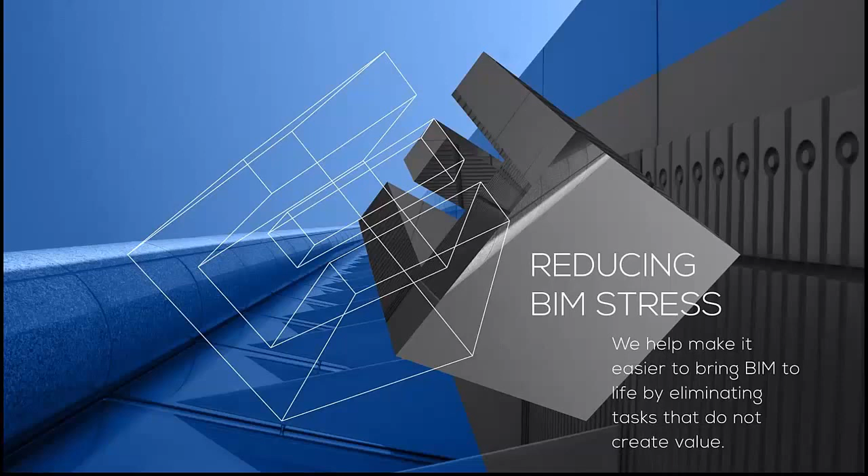At the moment we have sold more than 8,500 commercial licenses used in 129 countries. We continuously develop our existing solutions while also creating new ones based on the needs of our clients. The most important value of our team is customer alignment. We strive to respond to the needs of every client. Our work is driven by our customers' needs, and the benefits we strive to deliver are less stress in daily work, easier BIM, and satisfaction with return of investment. So our promise to the customers is reducing BIM stress.

Then we have a very powerful product, Cut Opening, for making openings around ducts, pipes, cable trays and conduits. Then we have BIM Tree Manager, which is very powerful for managing parameters and parameter values used in the project.

Then we have the Sustainable Design group, with 2 solutions. Then we have 4 solutions in the Smart Browser group. With those solutions you can very easily find families in the library, load them into the project, and modify them, so you can manage your content easily.

Then we have Tools for Revit, where you can find different solutions for documentation and modeling. Then we have Smart Assemblies, which goes for making shop drawings automatically, mostly for prefabricated elements like walls, columns, beams, floor panels and so on.

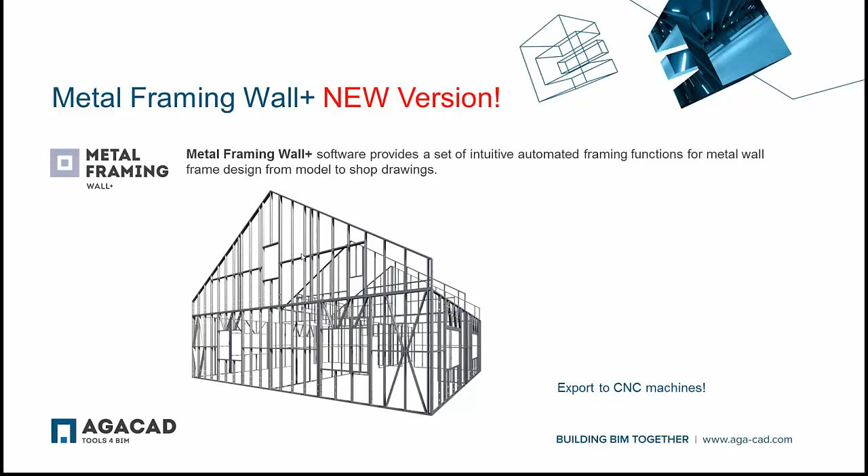Then Floor Plus, this is brand new software, but at the same time it communicates with Wall Plus because we use the same scenario for framing the floor panels. It automatically generates floor metal framing members, including joists, buttons, bridgings, blockings, noggings, and so on, and it can also be exported to a CNC machine at any time.

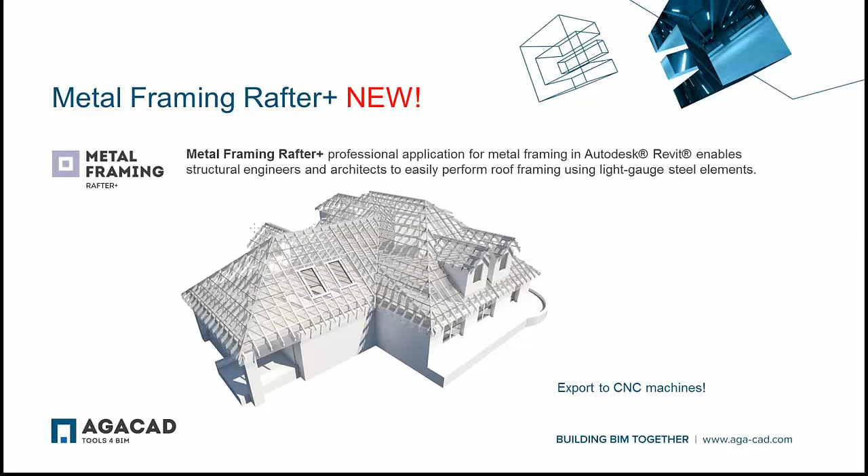Then Rafter Plus, which goes for making roof framing using light gauge steel elements. And then Truss Plus, which goes for making trusses automatically, and at the same time you can very easily make shop drawings.

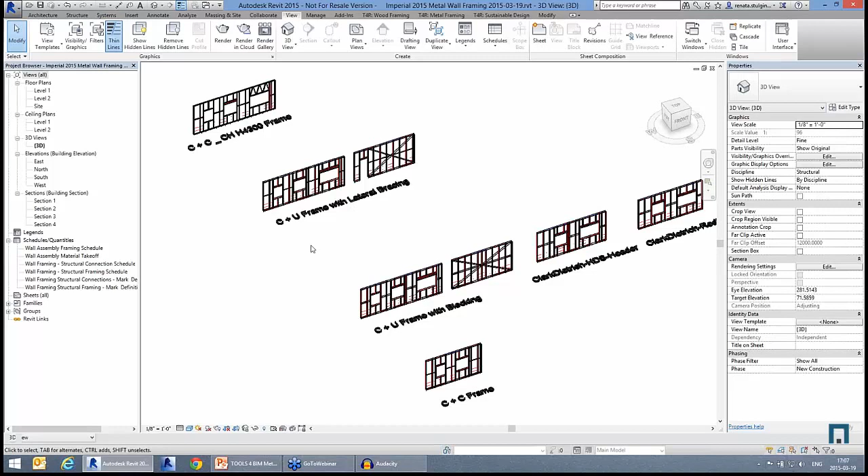First, I would like to start with a few examples and possibilities. Our Wall Plus, Metal Framing Wall Plus, supports C plus C and C plus U systems. These are the most popular systems, and if you are working with different manufacturers like Pinnacle, Howick, Metrol, or ClarkDietrich, you can very easily adjust those frames and predefine them exactly according to your current manufacturer.

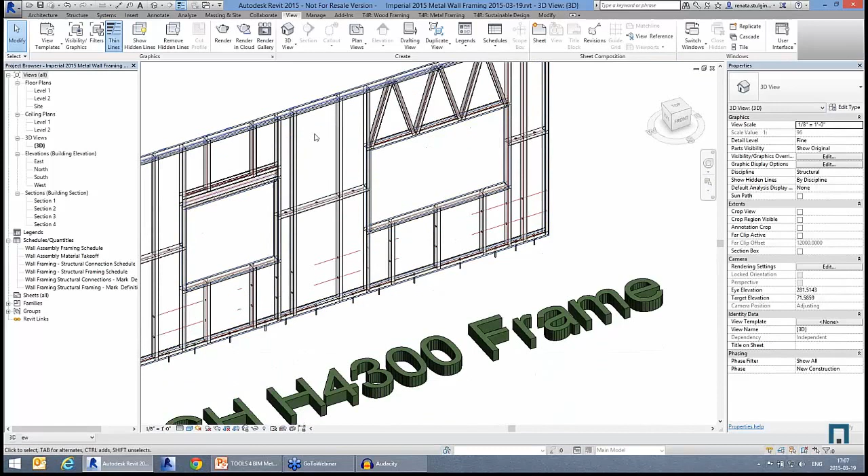So let's take a look into this C plus C system. As you can see, that system is tempered, so you can get such wall and frame ends. Then we can take a look into the C plus U frame with a lateral bracing.

So we can check here how those bracings look, and at the same time the tool automatically can distribute different connections. As you can see, U profiles are in the bottom and top plates, and for the studs we use C profiles.

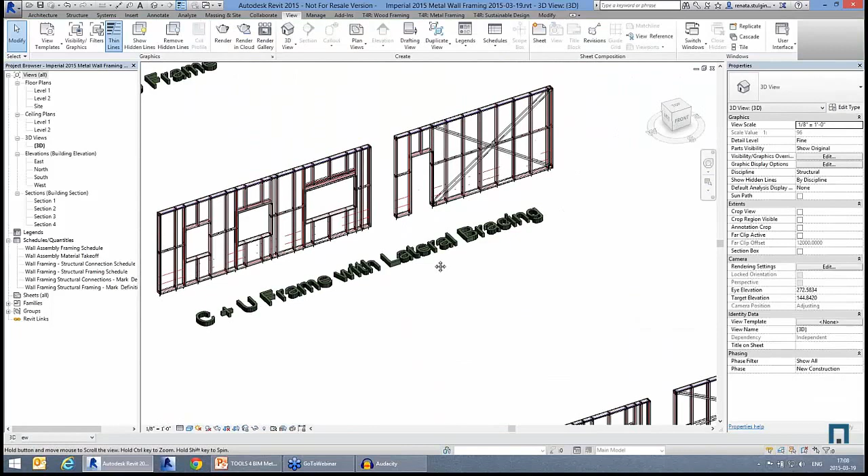Actually, those families, in my case I'm using Simpson family, but you can use any families you need. The main purpose of our product is to distribute those families in different ways according to your framing system.

Then one more example, C plus U frame with blockings. Again, we can take a look into those frames and into those connections. One more example.

Here we have ClarkDietrich headers, so you can use such headers if it's necessary. And also one more ClarkDietrich with a red header. Here we can take a look into the red header.

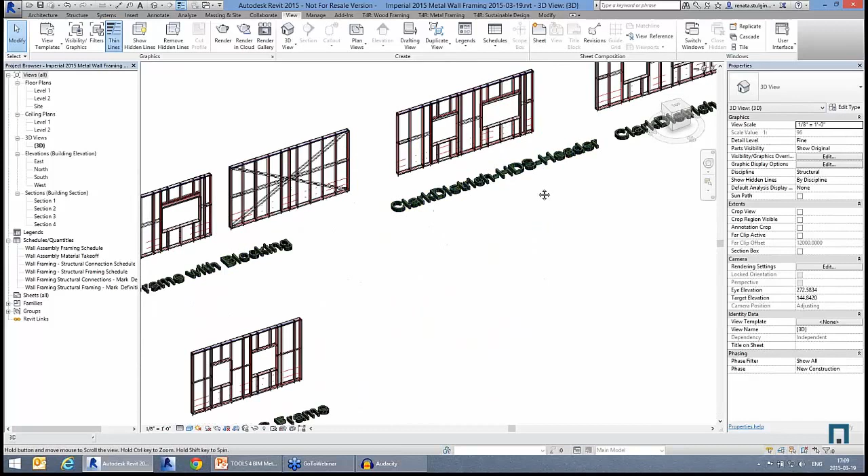As you can see, there are different options and possibilities for distributing frames. And as you can see in this example, we even have the offsets between those profiles.

Now let's start from the beginning, and I'm switching to my projects, and here we were going to try both those two systems, C plus C and C plus U.

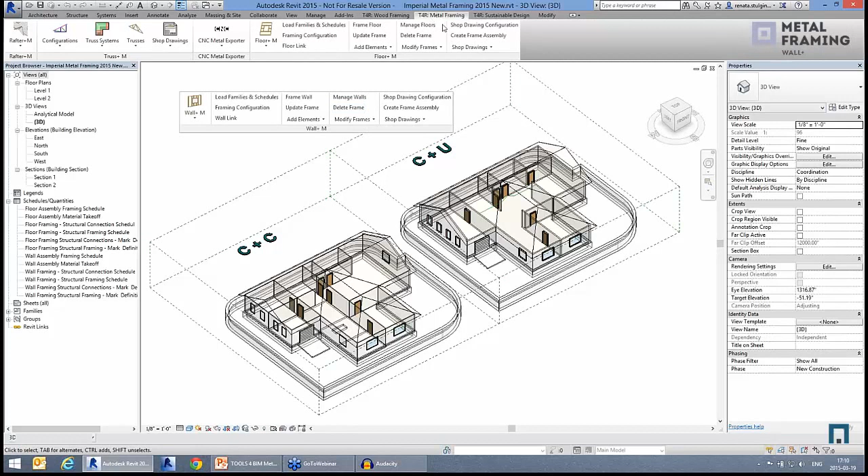After getting the installation of the Wall Plus, or for example Floor Plus, you can find those solutions in the Separate Tools for Revit Metal Framing tab.

The first thing you have to do before working with the project is load sample families and schedules into the project, and then with the framing configuration,

you have to find and predefine settings for your future frame. So the first thing you have to do is choose exactly what configurations you're going to modify.

So we're right now going to check the main frames, but you can also use secondary frame. Actually, in your wall you can have 2 layers, or even 3 or 4 layers, with different metal frame profiles.

Actually, with the software, there are no differences if you use 2, 3, or 4 layers in the wall - still we can very easily frame them. So there are no limitations in the amount of layers.

Then we can predefine our own configuration. Actually, those 4 are sample configurations that we provide with the product, but you can modify them and save them for your future projects, and also share that configuration with your colleagues, because those configurations are saved in a separate XML file.

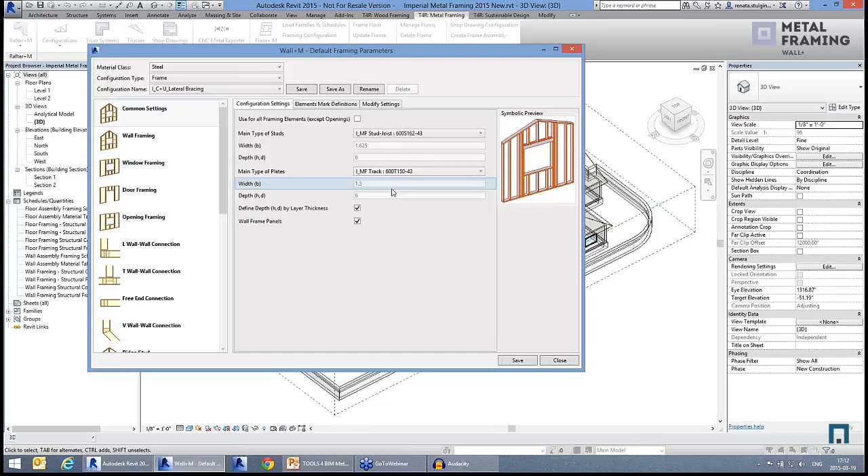Again, those families are our families with the profiles, but you can modify them easily if necessary. Also, you can predefine and add your own new types.

Then element mark definitions - it's a very important tab, because here you have to predefine your own marks and descriptions for different elements like top trimmers or sill plates, headers, and so on. That information will go into the schedules later, so that's very important.

Then with the wall framing settings, you have to choose what will be the distances between the main frames, what kind of top plates you're going to have and how many, the same with the bottom plates.

Then we have window framing. You just need to predefine your own settings for different window sizes. That's very handy, because you can have your own setting for small windows and another setting for big windows.

If we take a look into configuration, this is a separate dialog for predefining different headers, then for predefining sills, trimmers, other studs, so you can choose Pratt or Warren, diagonal cripples if necessary, and additional offsets. Then it's the same for door framing, and very similar for opening framing.

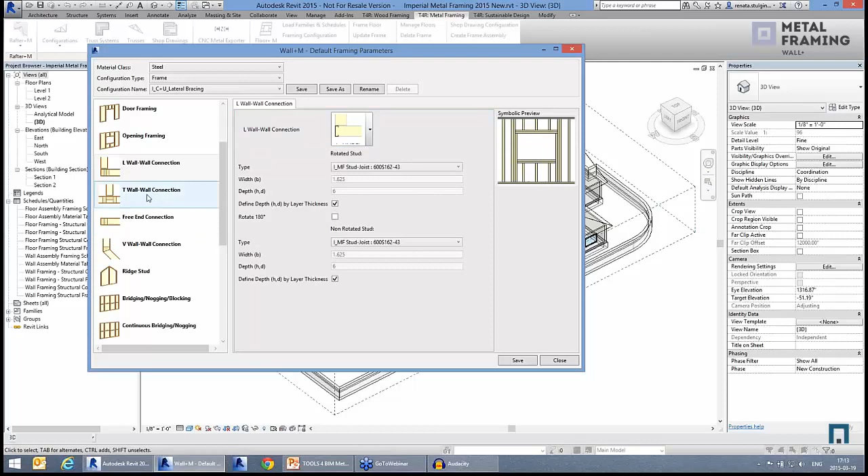So let's say if you have a duct or pipe going through the wall, we can very easily frame that. Then we have L connections, and with the new version we added additional L connections, then again T connections, free end connections, V connections.

Then you have to choose what bridgings and noggings you're going to use, what will be continuous bridging and nogging. Actually, this is a new feature that we added into the new Wall Plus version.

Then we added additional possibilities for the secondary bridging and nogging or blocking. Then we have the possibility to add bracings, then additional studs, additional noggings, and then details.

For the details, also with the new Wall Plus version, we added the possibility to insert different details, and you can have your own families and predefine those families, adding them automatically into different positions of your top plates or bottom plates, bridgings, headers, sills, and so on.

Then we have the possibility to add service holes, additional details on the studs, and stud holes. After going through that configuration, you just need to save it, and we can run the process.

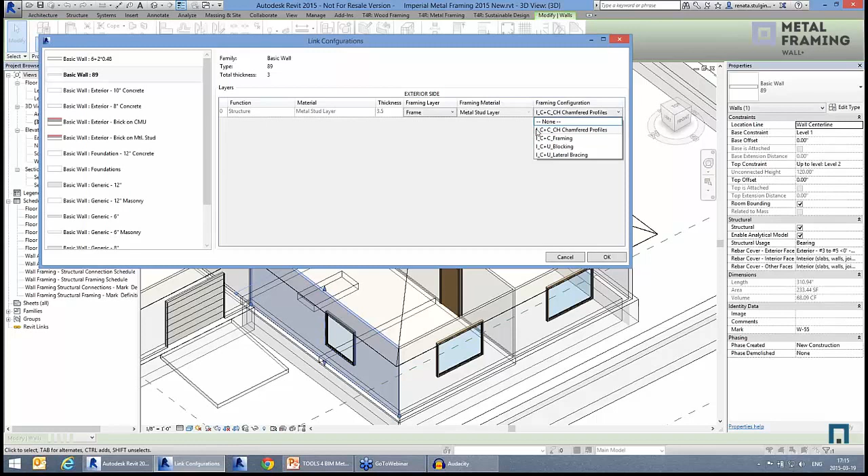I'm going to select several walls from different systems. Just before that, I want to show that here I have a wall with one layer, and this wall layer is linked with my configuration. After making your own configurations, you just need to make a link. This will show you the list of all walls used in the project, and you can link the layer together with a framing configuration. The same if we take a look into these layers, here I have a basic wall just with main layer, and then two layers from both sides.

It goes for the sheeting. It's very easy to make the link. You just go to the wall link, and say what framing configuration you use for the main frames, and then we're going to add sheetings from both sides. Now we are ready to add those frames.

I'm going to filter different walls with different shapes, and now we have to run the process. After pressing frame wall, the tool is adding frames according to our configuration settings. Now the tool knows exactly where to put the frames, because it reads information from the wall layer and distributes the frames exactly according to the predefined configuration.

You can very easily see those possibilities in the dialog. In the Revit model, now there are two walls framed, and you can see the process. Actually, all those frames are just regular structural framing elements, under the structural framing category.

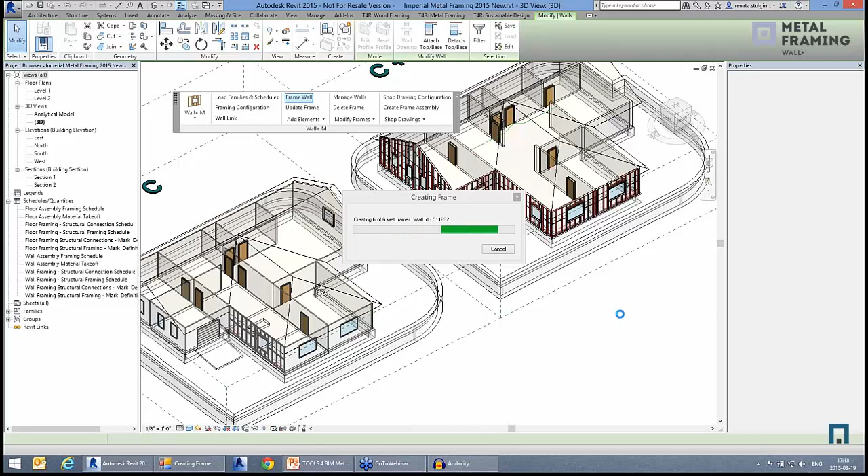And we have to wait for one more wall. You can just imagine how much time it would take if you tried to add them manually one by one for making those frames. It's really time consuming. Here with Wall Plus, after just 1 minute we have framed 6 walls.

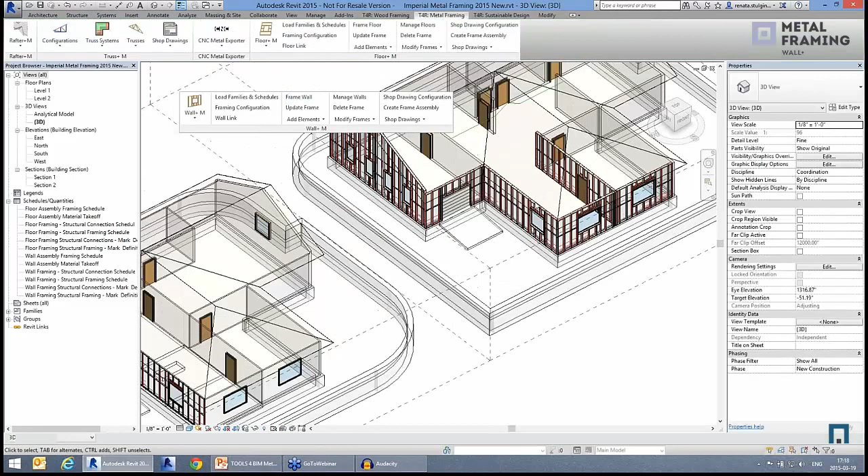Now let's take a look. Okay, so now we can see in this part we have a C plus U system. Let's take a look into those profiles, and also into this one - this is a C plus C system.

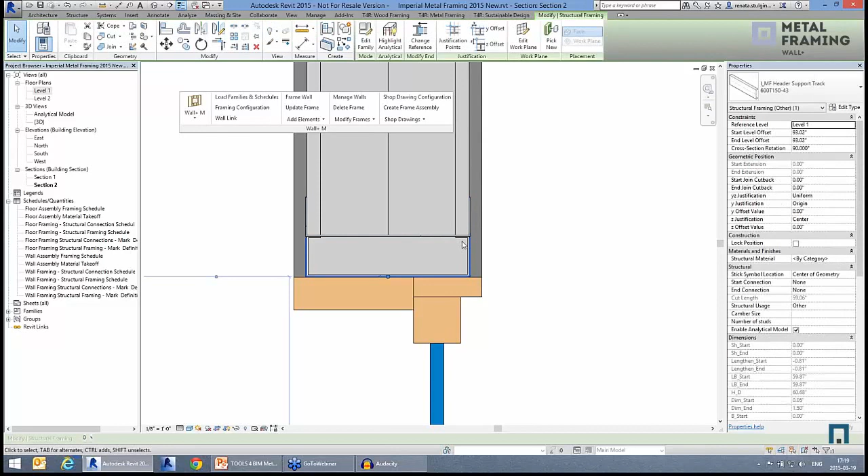Now if we take a look again into the plan view, the layers are added exactly where they should be. Let's go into the section and check the headers, so you can see what the headers look like. This is the U profile, then C profile, and then U profile above. One more section I would like to show you - it could also be such a header type, like U profile, then two C profiles, and then U profile again.

Now anytime we can modify the frames. Let's say if we make any changes in the model, we can anytime press on any frame and the tool will update it.

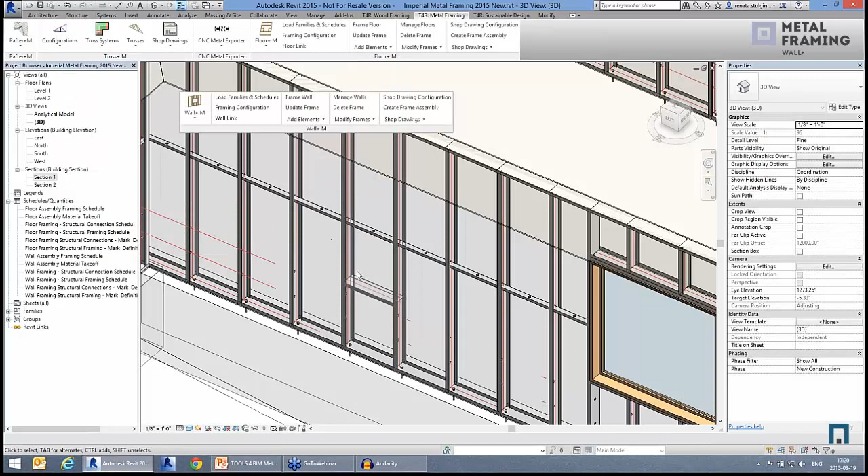Then let's say if we would like to add additional bridgings or noggings, you can very easily do that. We're selecting two studs, and then you just need to predefine the settings, the elevation from the top or from the bottom. Then let's add an additional stud, and we are going to put that with some distance from the selected stud to the right or to the left side.

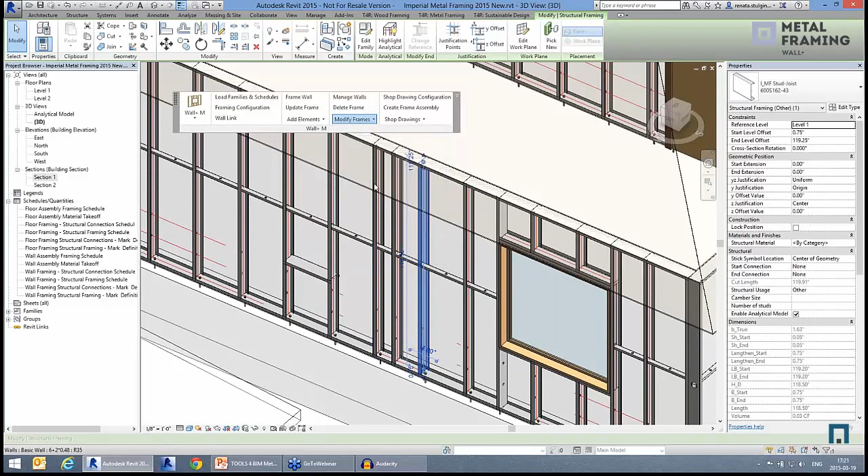And then we can very easily add additional elements or additional clip angles. So let's go to modify wall framing, and here we are going to add insert details, which will be on the open faces of the main studs, top plates, and bottom plates. We're going to add the Simpson family and put it here on the main studs.

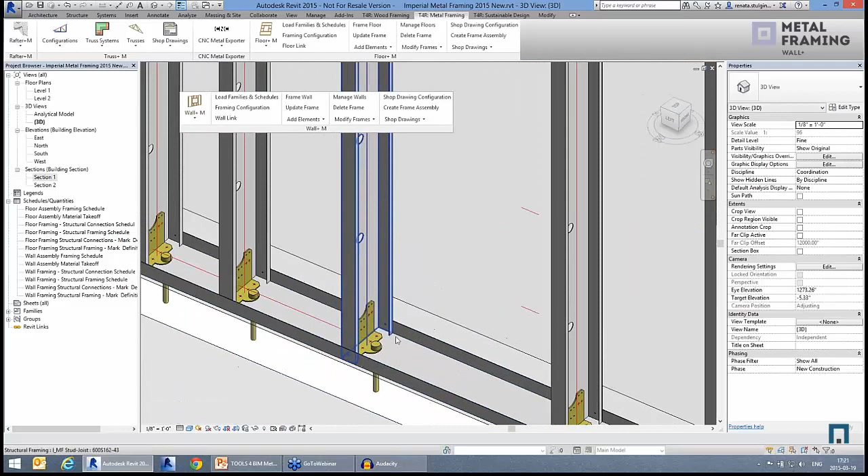After pressing OK, the tool will distribute those connections easily. This is the new version of Wall Plus that we added into this release. Again, those families are our created sample families, but you can modify them and use your own if necessary. Then let's modify the wall header.

Anytime you can go to modify opening framing, and let's use, for example, Warren, and here I'm going to add the offset between those two diagonal elements. Okay, and that's it, we did those changes very easily.

Now the same scenario we can use for the Floor Plus. As you can see, it looks actually the same as the Wall Plus, and it works in the same way. Even it uses the same families sometimes. And first you have to load the families into the project.

If we take a look into the structural framings loaded into this project for the Wall Plus and for the Floor Plus, there are not so many, because the tool can use the same families for the wall framing and for the floor framing, so it will save your project.

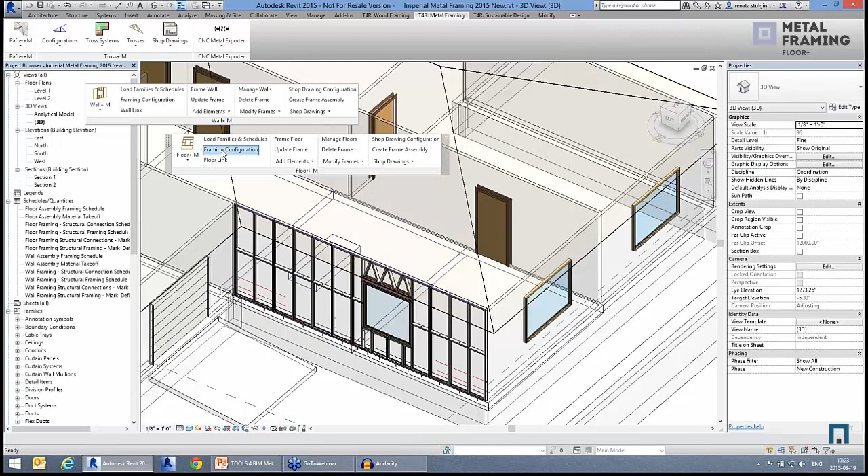And now again, you have to go to the framing configuration. You have to predefine your own settings for the main frames and for the battens. Again, it's very easy to understand. There are configurations for openings, for bridgings, continuous and secondary blockings, for example, for adding details. And again, you can save that configuration for your future project.

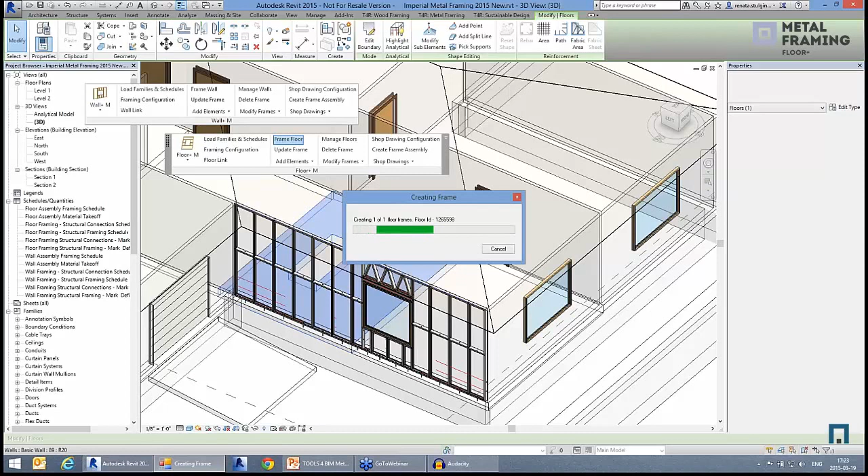After that, it's just the same scenario. You have to make a link between the layers from the floor and configuration from the Floor Plus. And that's it. After adding the link between configuration settings and the floor layers, you can very easily frame that floor.

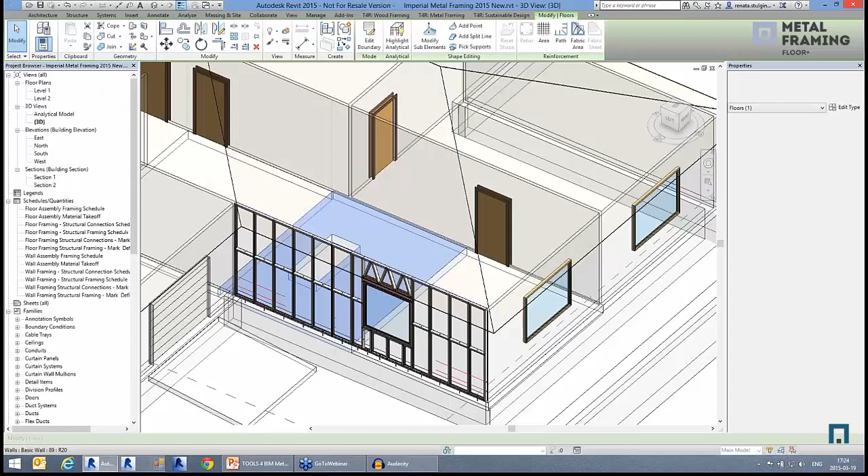And again, those profiles can be exported to a CNC machine. Okay, so here we're adding the main frames, and then we're going to distribute battens. We can also take a look that with the Floor Plus we have metal connections between those frames. Let's select the floor panel, and let's add battens.

Then the last thing that you have to do is make shop drawings. It's very easy using the Floor Plus or the Wall Plus, because in both products we have shop drawing configurations, and you can very easily make shop drawings. Okay, so here we have battens, and just one more, we're going to frame this floor panel, because I'm also going to use that in making and preparing shop drawings.

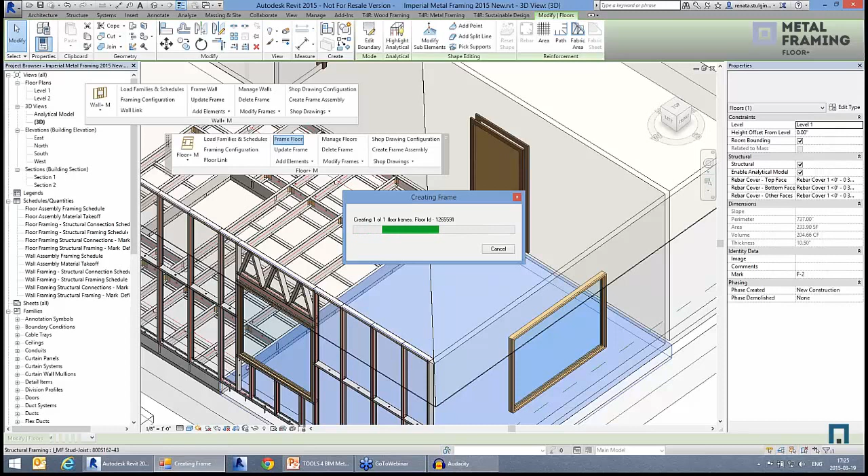So next, we're going to make a shop drawing configuration, and we have to predefine the views and the schedules that we want to achieve for every floor panel. The tool will make shop drawings, the tool will make assembly, and automatically it will collect all connections, all frames, service holes.

Okay, so we have those frames here, let's go to shop drawing configuration. Here you just need to predefine the views that you need to get. It's very easy. You can predefine your own views with your own naming, with your own layers that you need to put into each view, and then the view template that comes from your project, so you can make your own design, your own visibility graphics, and apply that to every view.

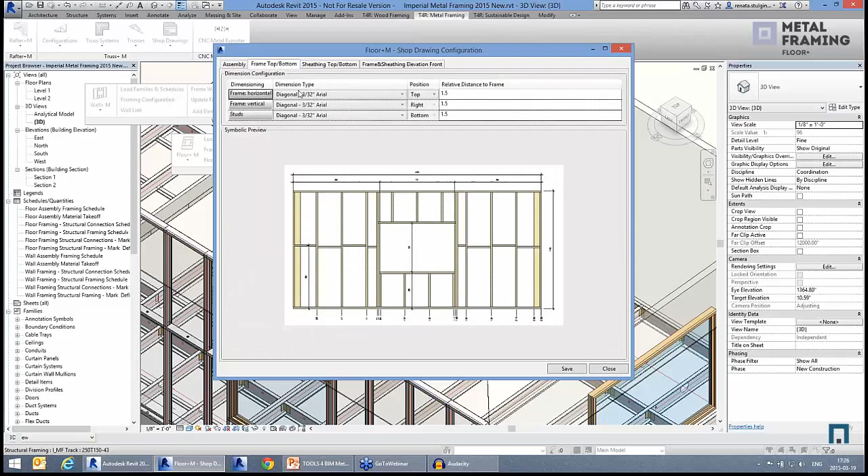Then you have to pick the title block from the project, then the part list and the material takeoff. Those schedules also come from your project, so you can make your own schedule with your own design, your own columns, and use that schedule as a template for making assembly schedules. Then you have to pick dimension styles that you're going to put on every stud.

So that's it. After making that configuration, you just need to select any frame from the model and press Create Frame Assembly. Now the tool collects all frames from this floor panel, adds dimensions, makes schedules automatically, and also calculates the mass for you.

You have to know that before calculating weight or mass, you have to add materials with a density. That's a mandatory condition if you want to get those values.

Okay, and we can go into the assembly. So this is the 3D view. Then we have the top side view with the dimensions and with marks. The last thing we have to do is sort elements.

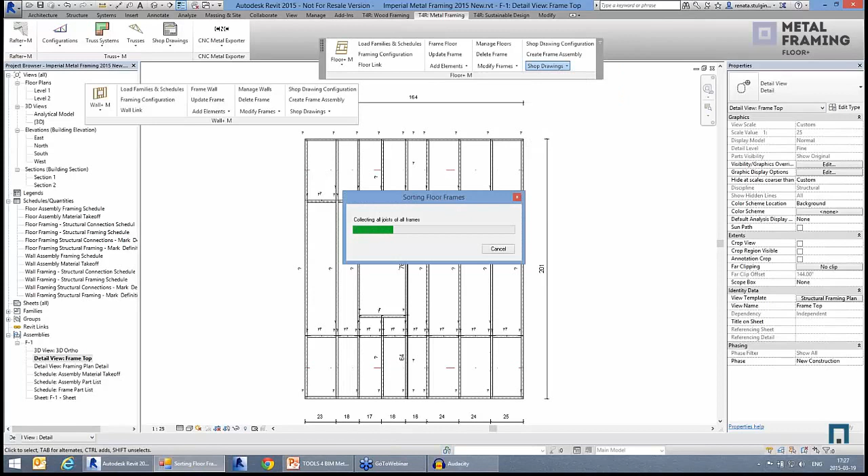The tool will renumber all those frames, and the tool will renumber all connections that we added into the frame. Then we can take a look into one more view. Then we have part list, then material takeoff part list.

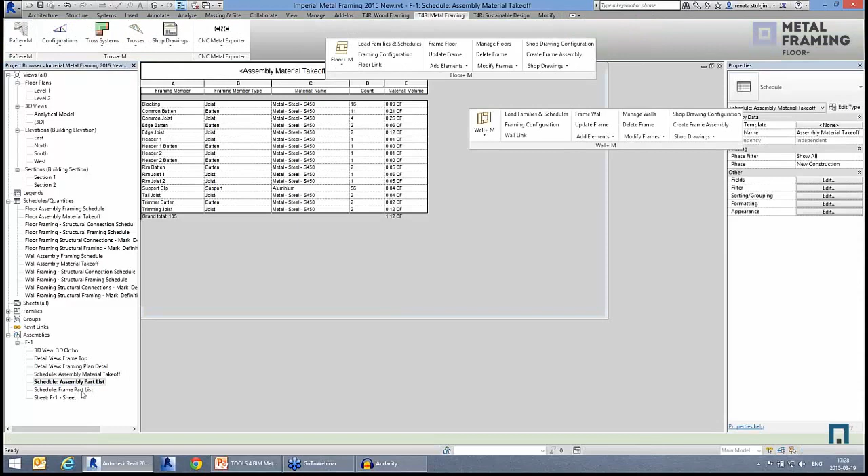As you can see, we have the length and the mass for every element, and then we can put those views into the sheet. So here I'm going to put the top side view, then here I'm going to add 3D view, then material takeoff, then the part list, and then assembly list with all elements.

After making that first sheet, I'm going back again into my shop drawing configuration, and I'm going to say that this sheet will be used as a template for my future assembly.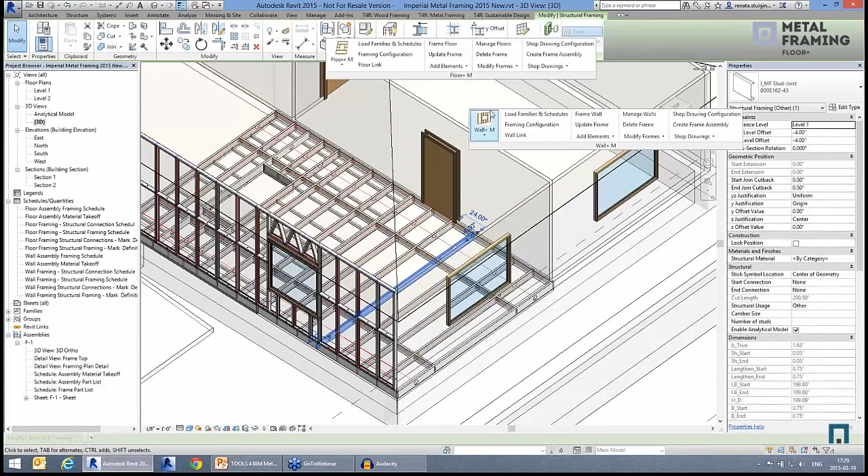Then again, I have to come back into my previous model, select any frame, and press on Create Frame Assembly again. Now the tool will make assembly again. It will add dimensions, prepare all the views, make schedules, and put those views into the sheet automatically.

Okay, we can just go directly into the sheet. Yes, and we have results with the dimensions, with all the schedules we need.

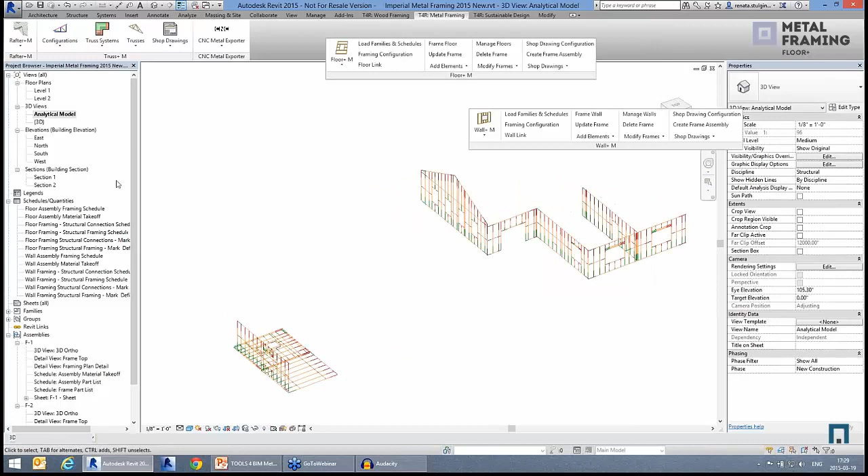And we can check the analytical model. As you can see in my analytical model, we have all analytical lines. So everything is okay with our frames, and we will be able to use those analytical lines in the calculation system.

Okay, so now I'm going to switch the screen to Valence's screen, and he's going to continue with the roof examples for the roof, and with making trusses automatically and rafters.

So I have this sample project here, and I will run briefly through the basic things you should know about this tool. The same as the previous tools, you have to load truss types into your project, then make some configurations, and then you can insert truss systems or separate individual trusses. Then you can make drawings and export to CNC machines.

So I already loaded truss types to this project, and you can see the configurations here. I have 3 configurations for truss types here, and you can create more of them.

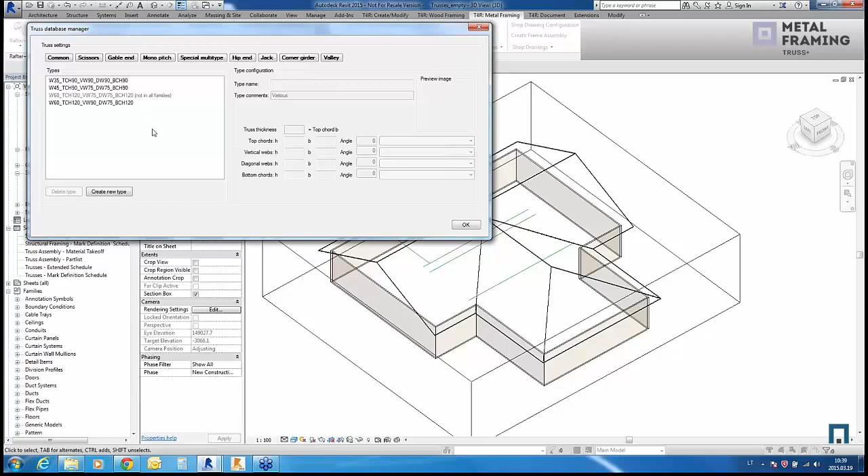You have new types now, and you can use them for your project for modeling later. So this is for truss configuration, one thing, and let's go to the other configuration options for the truss system configuration.

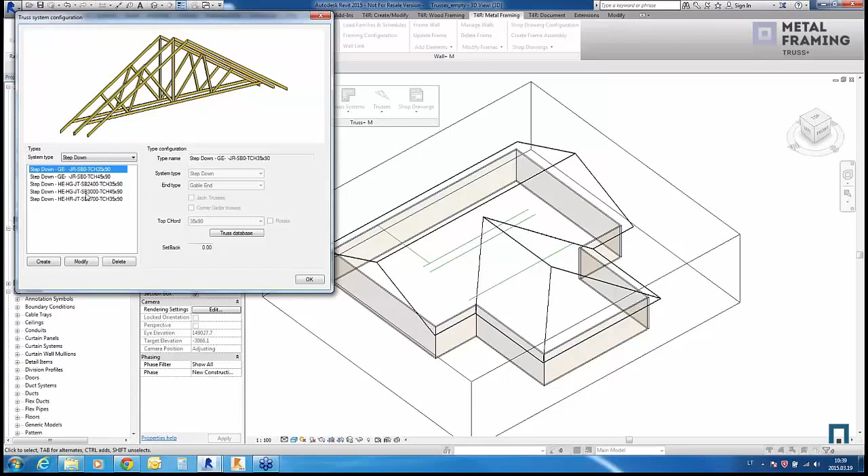So it means what truss systems will be used for your model. You can see here we have gable end and hip end configurations, and we can modify or create new ones by selecting whether we will insert jack trusses, or it will be only rafters, or we will insert corner girder trusses, and we choose the type of truss here by the top chord.

So we can create as many types as we want, and later use them for generating trusses. And another thing is truss design settings.

So this is configurations for the jack and corner girder trusses. We can define how vertical and diagonal webs will be placed, what length, and so on. So we can configure that, or we can leave it by default.

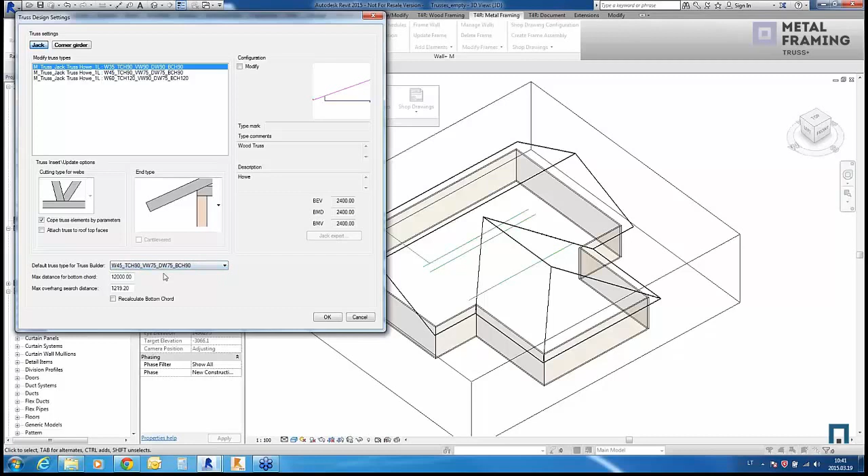This option shows that elements will be cut to one another, and the end type of truss, we can select one of these. We need to select the type of truss which will be used for our tool of truss generating. I will show you later about this tool.

Okay, so after we make configurations, we can go on with truss generation. First of all, I will show you how to generate a truss system for our roof. I will select this roof, and I will pick the edges of my roof to define where the system should be placed.

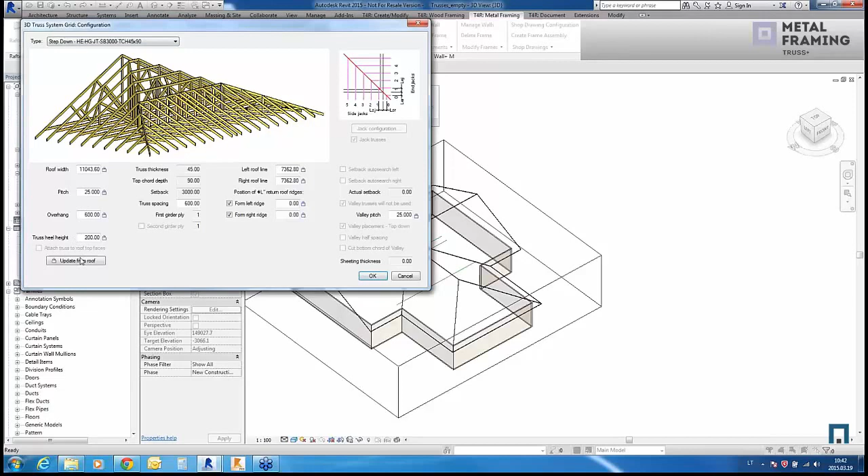Okay, let's see. The software gives us a recommendation to use this type of truss system here, but we can change it to another one if we want to. I will use this one. I will leave options like overhang or truss spacing as they are by default now, and I will hit OK.

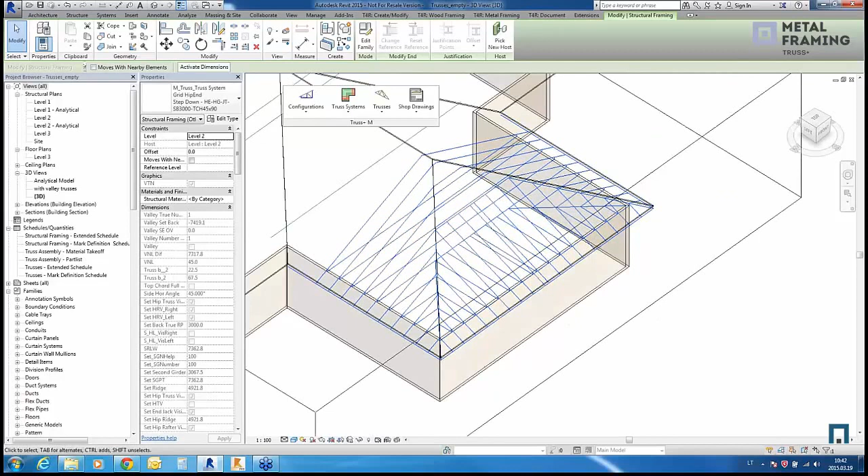And let's see how the solution will insert a 3D grid of trusses to my roof. So we have now a grid for the trusses. We can overview if we are happy with the form of this grid, and we can generate trusses in the place of this grid.

I will add some more grid systems here at the end of this.

Select the appropriate edges and let's see. We have recommended type, and we can choose the type we need. We will create another one here because I want to show you all the roof trusses generated, and save that.

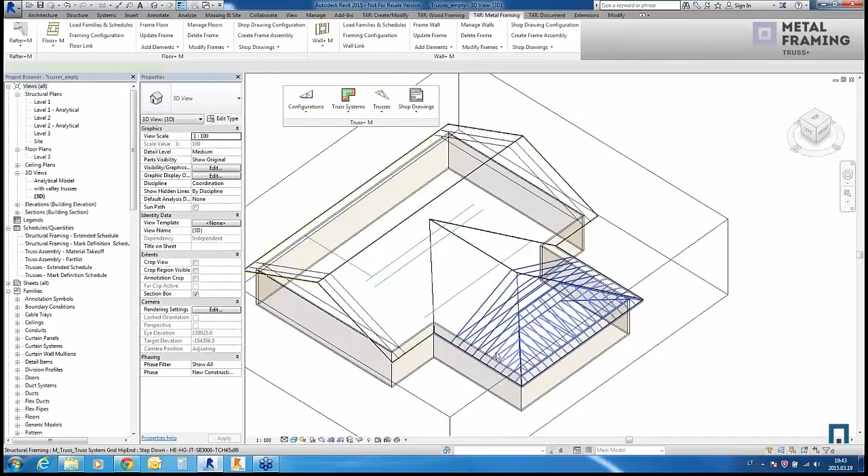Now we have some grids, and we can generate trusses by hitting the generate truss button. Now we have this window where we have to select the type of truss which will be used for common trusses, hip trusses, jack trusses. So we can select from the list the type of truss we will use. I will select the Fink type of truss, common trusses, and leave this by default.

Let's see. Now the tool will generate trusses in the same form as the system grid we already did, and it will cut elements according to the roof. It will cut elements to each other, and it will be done automatically. We will not need to go through the plans and sections and plane setups manually, because to catch all the angles manually would take a lot of time, much more than we do right now.

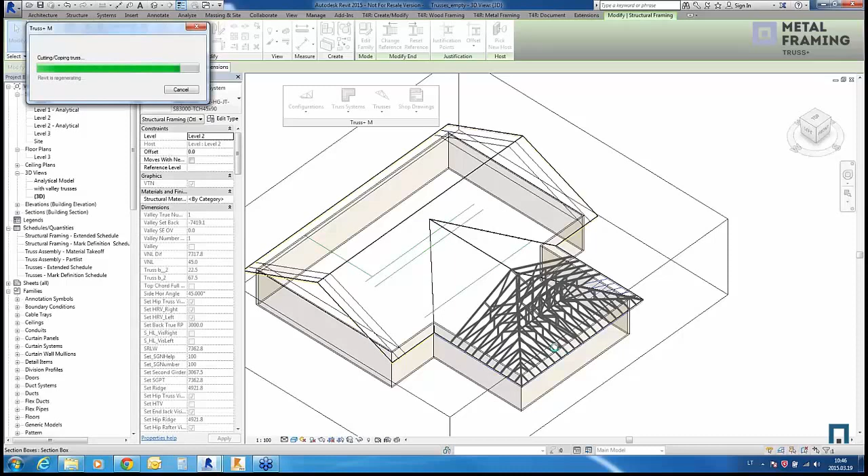That's pretty quick, and we'll do the same truss generation advanced. We need to again select the types of trusses, gable end trusses. Let's see, it will accept only two or three trusses.

So we have here a gable truss with a window, so we can insert this window, or we can just remove it by using family options.

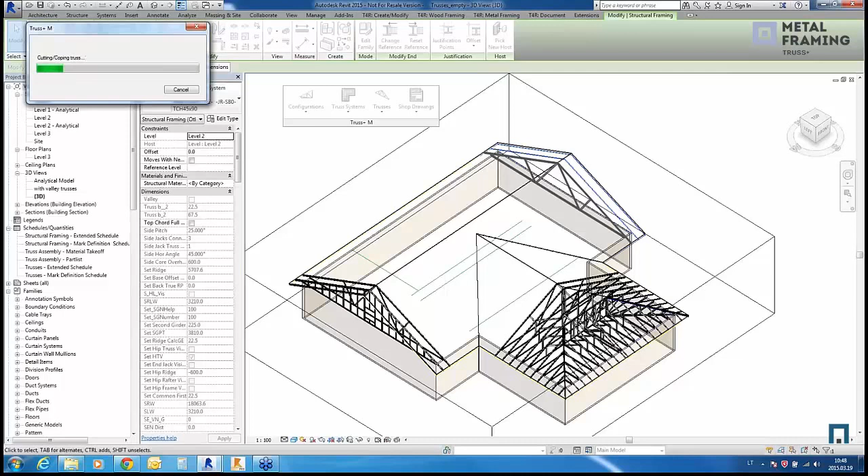I want to show a few examples of how to use truss systems and how to create separate trusses by using model lines I have prepared here.

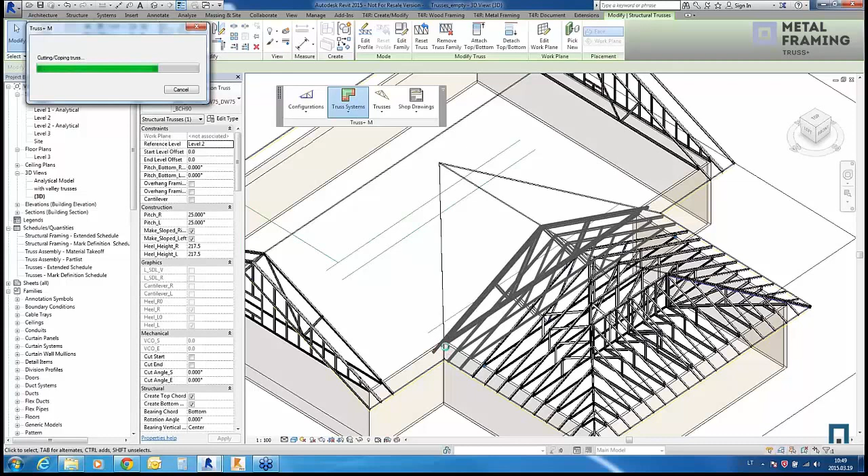So we have this truss system, and we can use other options to generate more trusses. I can select one of the trusses and do like a photocopy of it. It will generate by the same steps as defining the system grid, creating additional trusses until the situation changes here, and it will generate two trusses for me because it was also in the configuration, so I can use them for support, and I can do the same with other trusses.

Let's see how it makes a copy of these trusses, at 600 millimeters, using the same method.

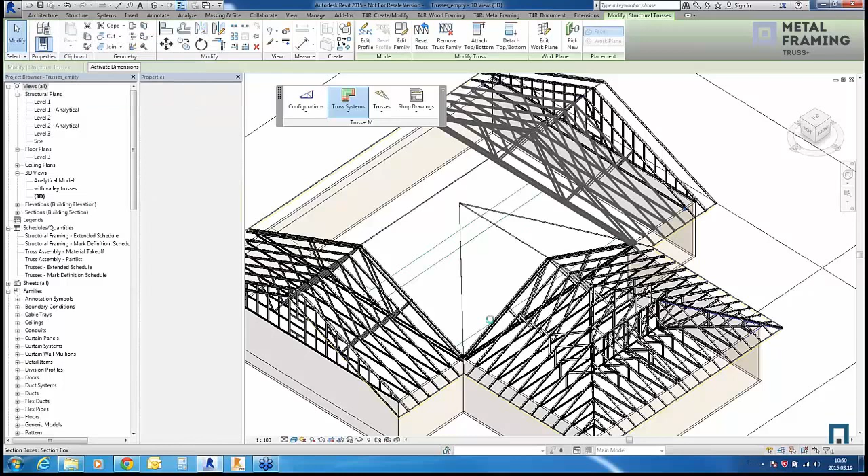It cuts the overhang of the truss automatically because of this situation here, so we don't need to bother about this. So we have this truss system and copying of trusses, but now I want to insert a different shape of truss here.

So I will use the insert truss by selecting model line tool. I will select the type of truss which I want to use for this, click OK, and it will create the truss according to the shape.

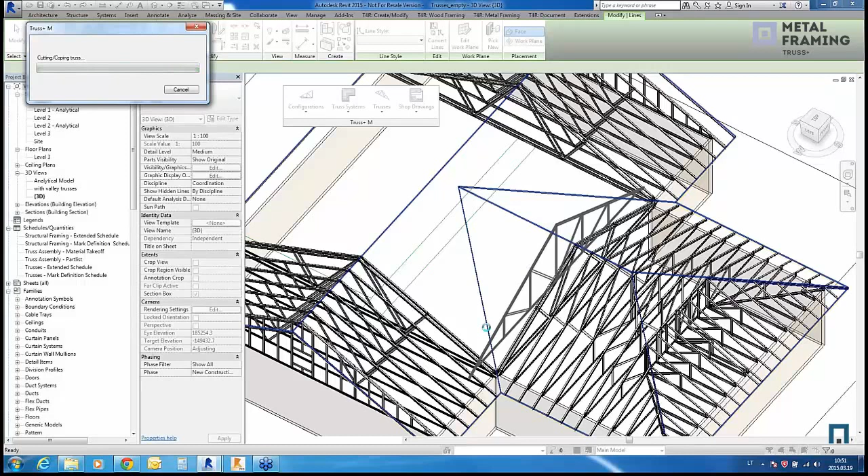So you will see the result, but the model line is just a model line drawn at the level of the top of the walls, and we can see now that we have this truss over here. I drew the model line from this truss to this truss, so we can use these trusses as support for this truss.

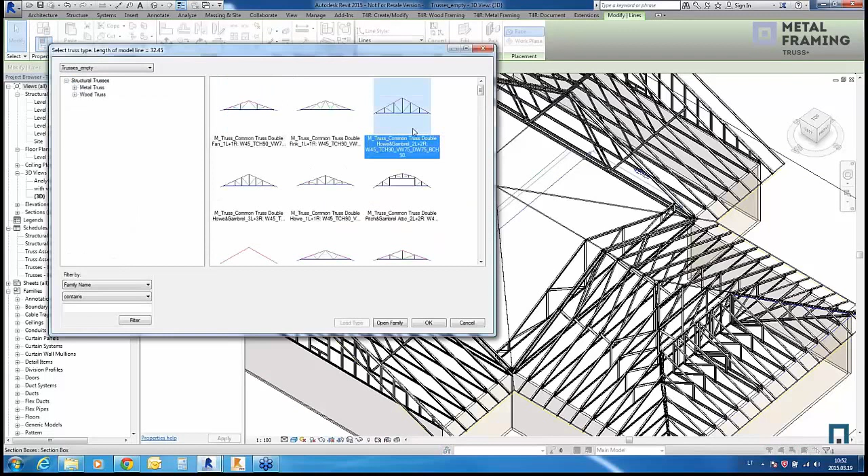I can do the same with other model lines. I will again insert trusses by selecting model lines, select the same type, and let's see. Now this model line is drawn at the edge of this roof intersection, and the truss has parallel joints.

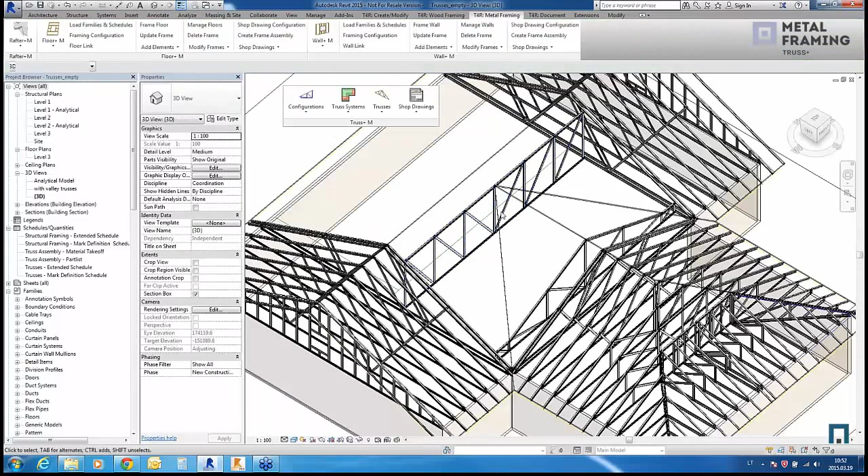Now I will use another command. I select these two trusses and select the command to generate new trusses with spacing like this in the middle of them, updated from the roof. So the tool will automatically create trusses and update the shape of the truss according to the roof, because these slopes are different, and it should change the position of the top chord and arrangement of webs and vertical studs. So let's look at it.

So we see that it inserts the truss, then adjusts this truss to the shape of the roof. The step was 600 millimeters, so it creates a truss with this defined step. Okay, almost over now.

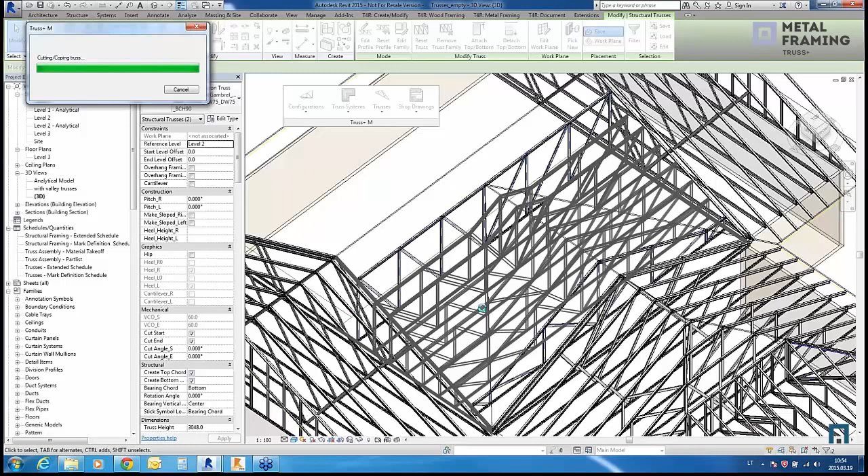It would be a really big headache if I would like to create this manually. How to see and enjoy all these new trusses. Yeah, it's nice. Okay, and I will make another truss here as a supporting truss.

Select the same type, and I want to create monopitch trusses to this direction and support them on this truss I'm generating now. Okay, so I have this truss, and I have drawn already a model line here. So I will hit this model line, selecting trusses, selecting model line, and now we select mono pitch. This one, okay.

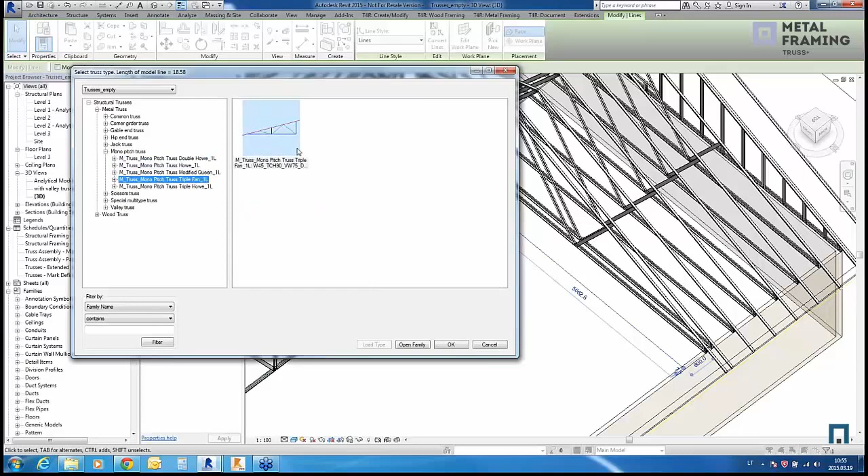So we have these tools to copy, to arrange trusses, and we can use even this simple function like copy array trusses. We can do the array. I know the distance already, so I just enter the number and I will hit OK. So it will place 16 trusses in this direction with a step of 600 millimeters.

Yeah, so we can just look at this now. Okay, so I think it's okay. This roof now has this structure. I showed you what I wanted to show.

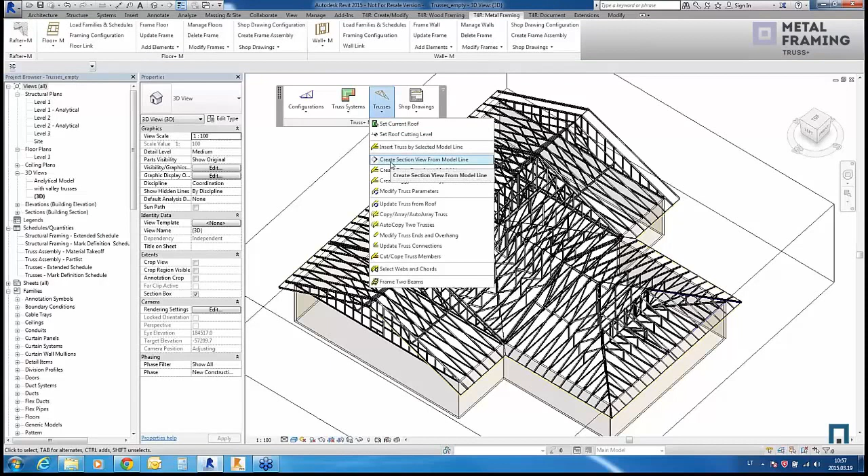How to generate system grids, how to generate separate trusses, but another powerful tool is to create truss type model lines. I will show you how to do this in a different project here.

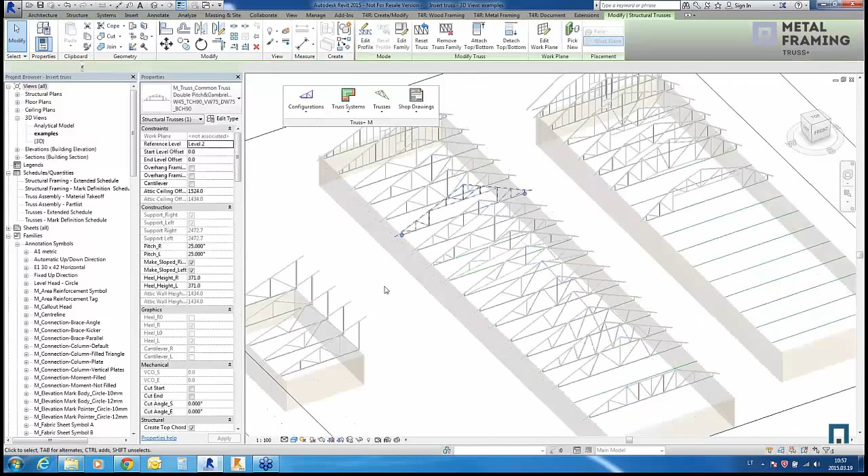So yeah, you can see that you can create different configuration trusses here, like fan type or scissors or trusses with attics and so on. So we can create for mono pitch or double pitch or fields like this, and we can do it also.

I will show you the tool I mentioned, how to generate unique types of trusses. And we have something like this. The roof is a very different shape, so I will create truss by using this function to create truss type from the line, and I select roof.

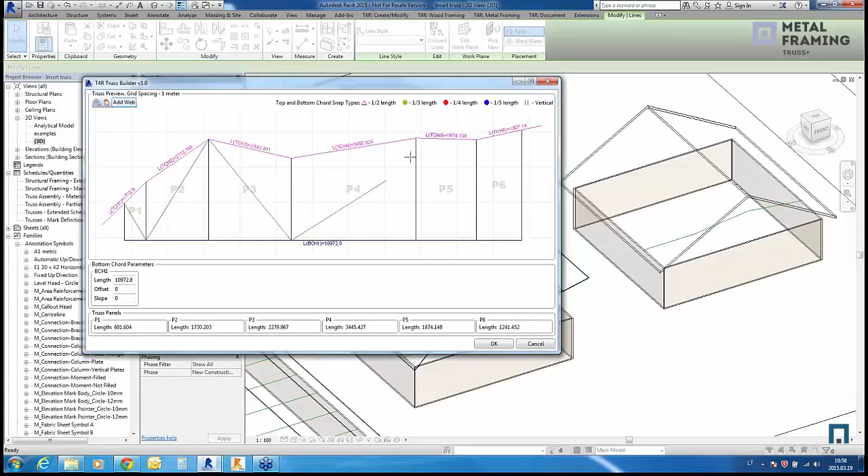And now you can see that the top chord goes like the roof, and the bottom chord is the same as the model line. And we can add webs here. We can use a drawing tool. We have some snappings here, like you can see the options here.

And I will do it like this. I hit OK. And now I can give it a new name. OK. It will be grouped under the special type of trusses.

And let's take a look how the software solves this task. It will create a new type of truss. So, because there are so many configurations of roofs, we need this tool to solve this kind of task for us, since you cannot predict what the roof type will be.

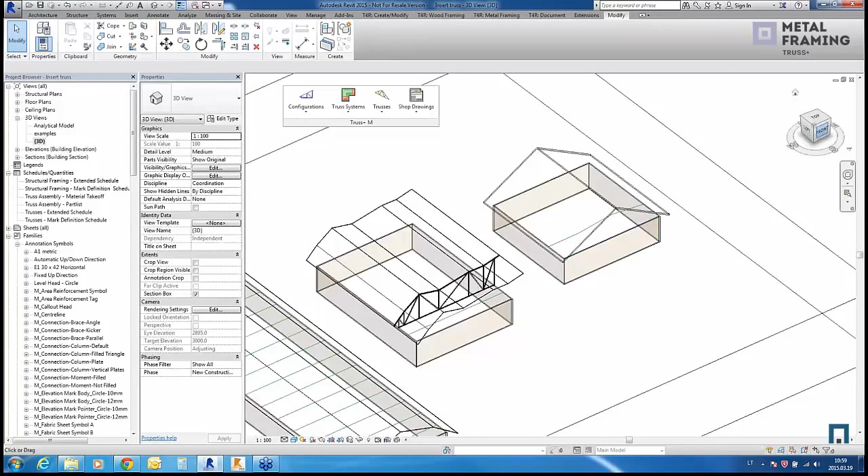So now we have this truss, and we have it as a type. So we can go through it. And what is also important is that your bottom chord may be not only horizontal, but you can make it

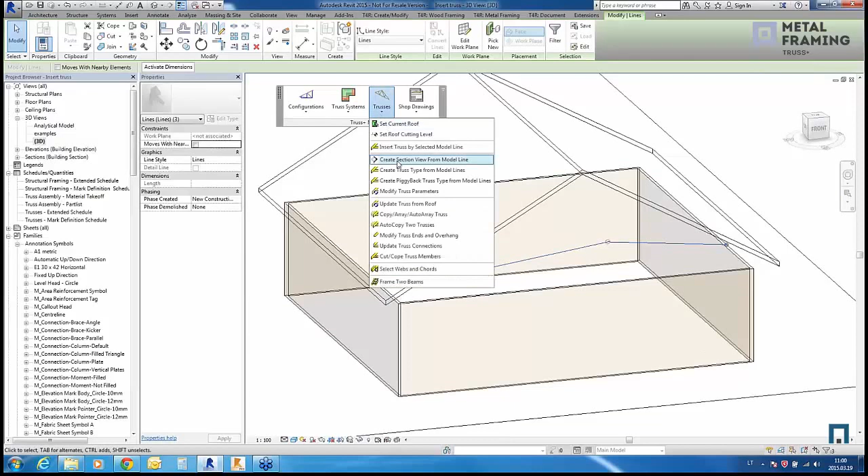like this, like on different model lines with some angle, and I will use the same option to generate a truss. And now you see the bottom chord is a different configuration, and we can now just add our webs and hit OK and have some new type of truss.

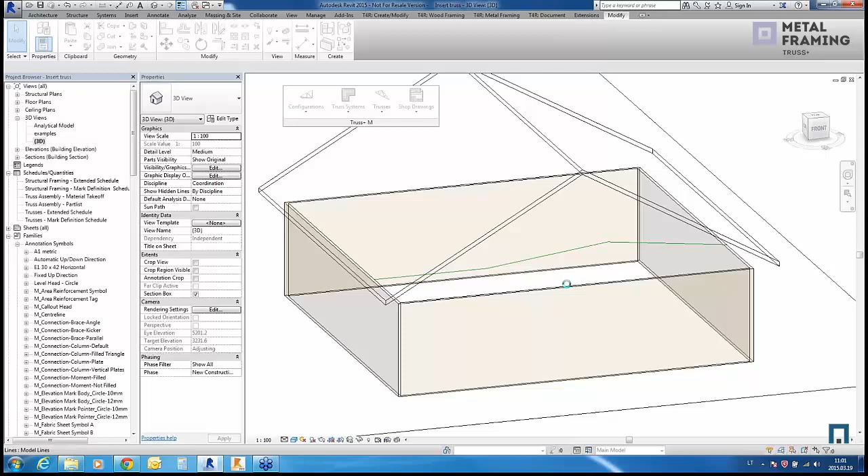So we have some typical trusses, like 50 of them, and the option to generate any type of truss you want, and you can do it very easily, just by picking the lines and using the roof as the top chord position. So now you see the truss here.

Okay, so the other thing, if you want to make drawings, you can also do that. You can select, calculate truss volume, sort the trusses by selecting unique mark numbers and making framings with IDs and so on. And you have to make some configuration for your views.

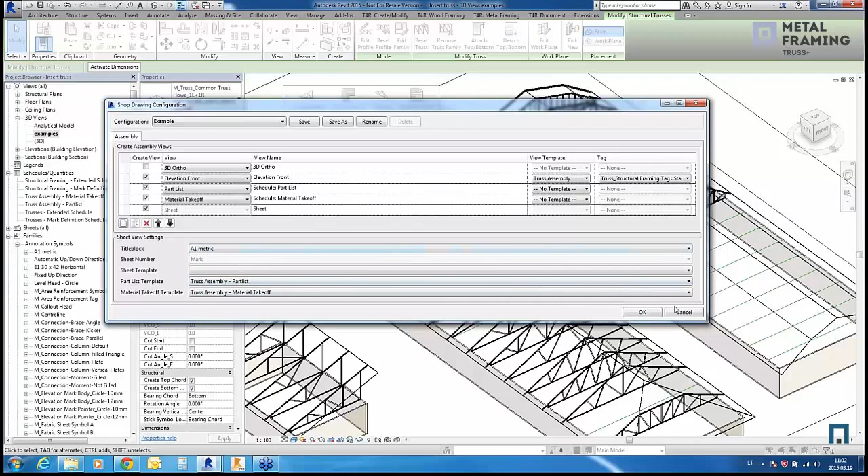Like you can create views, select view templates, what tags will be inserted, and select what schedule templates will be used, title block, and so on. And after you select the truss and make some sorting, you can create an assembly on this truss.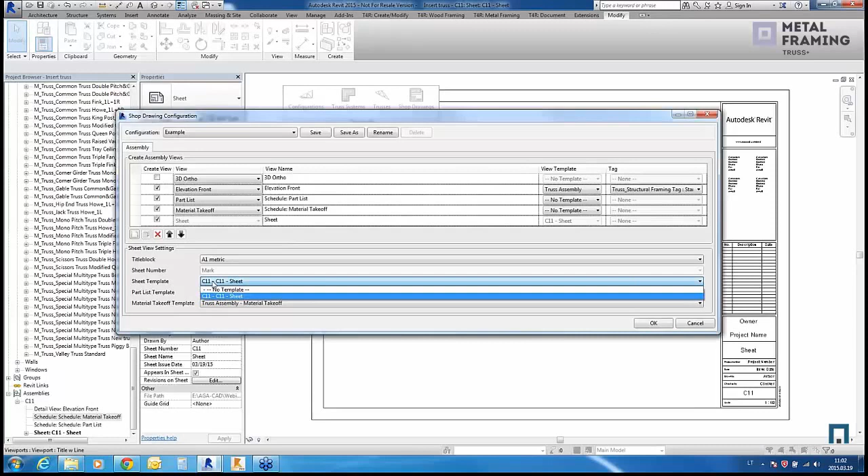And under the assemblies, you will find the truss with views, which you can insert and use for your documentation later. And now we have the sheet, and we can change the configuration and use this sheet template as a template for other trusses to create assembly drawings for the other trusses, as you saw in another presentation.

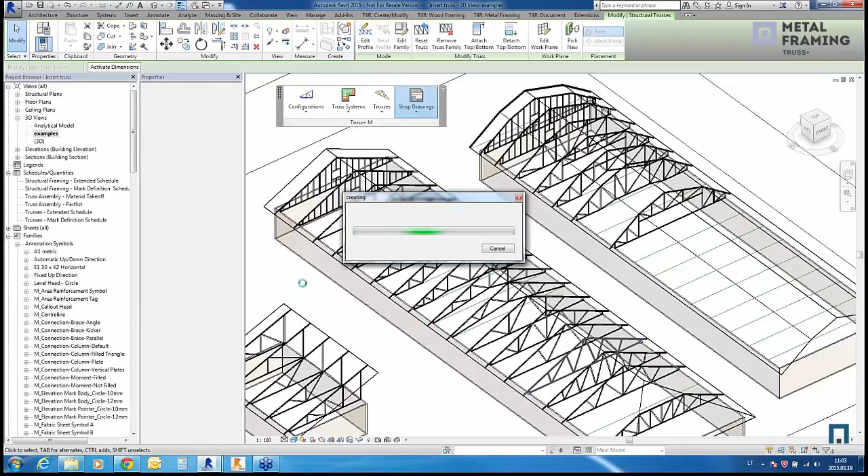Okay, I will select one more truss and just take a look how it is done. We have new assembly and we have drawings, so dimensions, tags, and schedules of all the elements, the characteristics we need, and so on.

So that's what I wanted to show you with trusses. There are even more options here, but let's just stick to the basics for the beginning. You can see that you can do a lot of good quick modeling and quick drawings, and export to CNC machines, as I'll explain more on that.

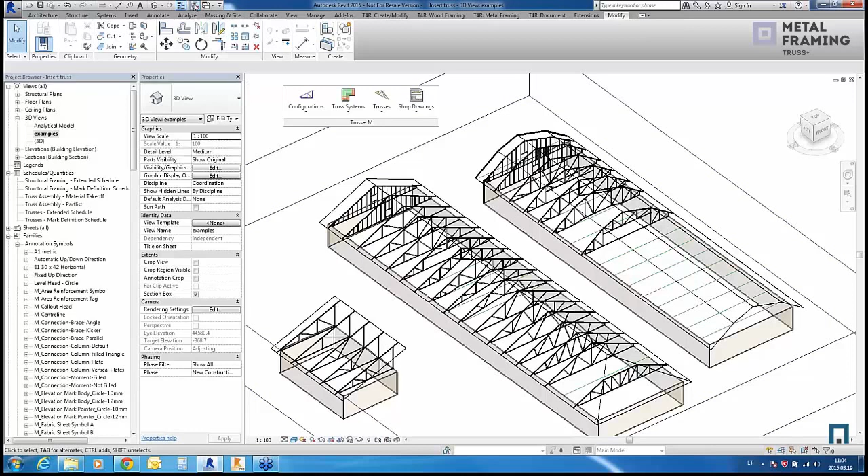So this was trusses for roofs, and I can show you the other option, like by using truss systems which were created. You can see these elements between trusses, valley trusses placed here, and so on. So there are more options in this solution. Okay, I will finish with trusses now.

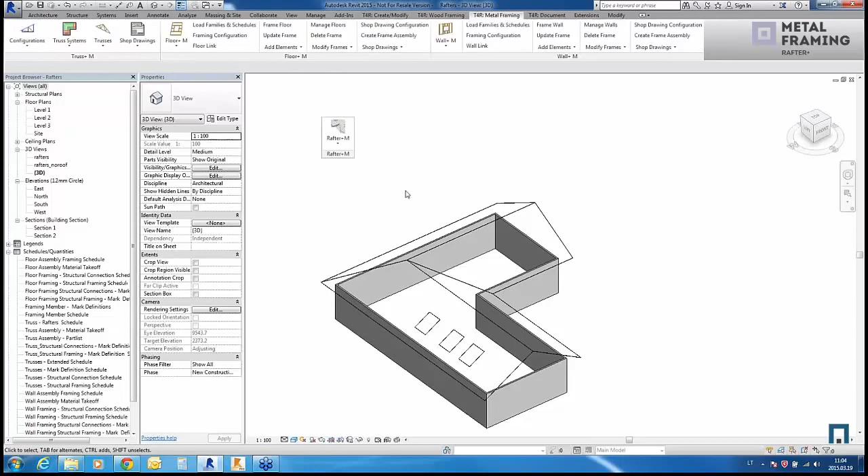Let's go to the roof, where I would like to show you how to work with the rafter tool. So I will drag it here. It's the same as with other solutions - you first load families and then use all these tools to create and modify the elements.

So I just select my roof, I create common rafter systems, I choose the end cut of my rafter, I choose the type of my rafter, and then spacing, and where it should be placed according to the roof. It will generate frame systems on the roof, aligned according to the roof, and you can see that they are placed according to the slope of the roof.

Now I have 3 windows here, so I would like to make openings in these views. I can select a command to create openings in these systems. Let's see the result.

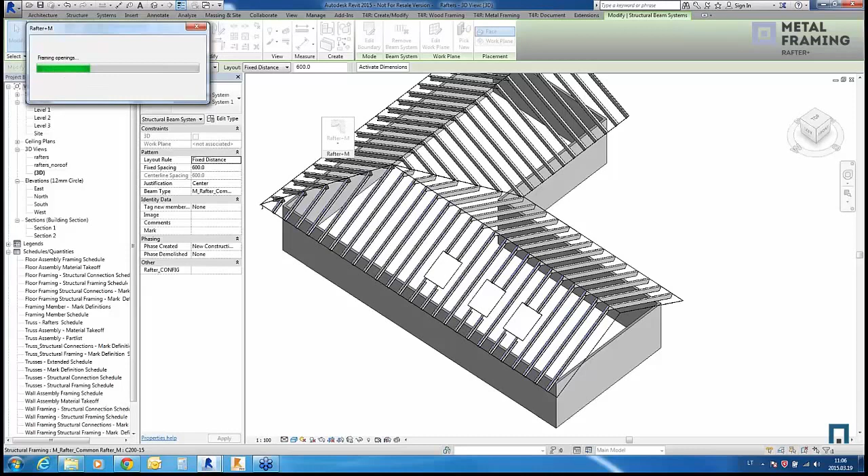Okay, we have cut our rafters, but it would be nice to have some framing around openings, so I will use this command. I will use the same profile for this. Let's see - yeah, now we have the framing inserted between the rafters to frame openings.

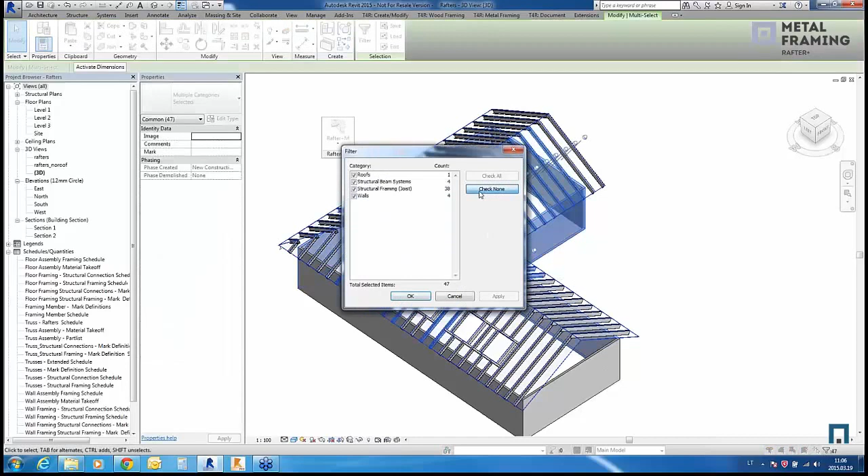Let's go further. Let's insert some valley. I will select all the systems, and I will insert hip and valley rafters. I will select its double C profiles.

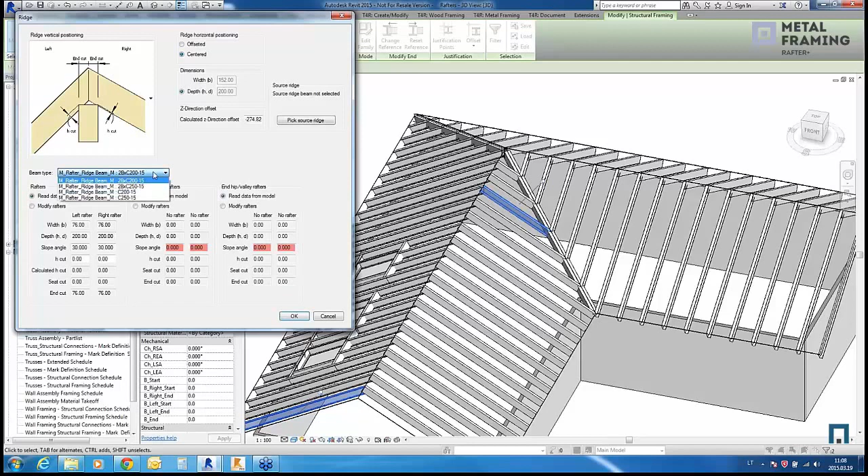Okay, with two rafters, and we will insert a ridge element between them. So I select an option for how the ridge will be inserted. Let's enter it, and I will use two profiles again. Let's take a look - okay, it's already inserted at the bottom of my rafters.

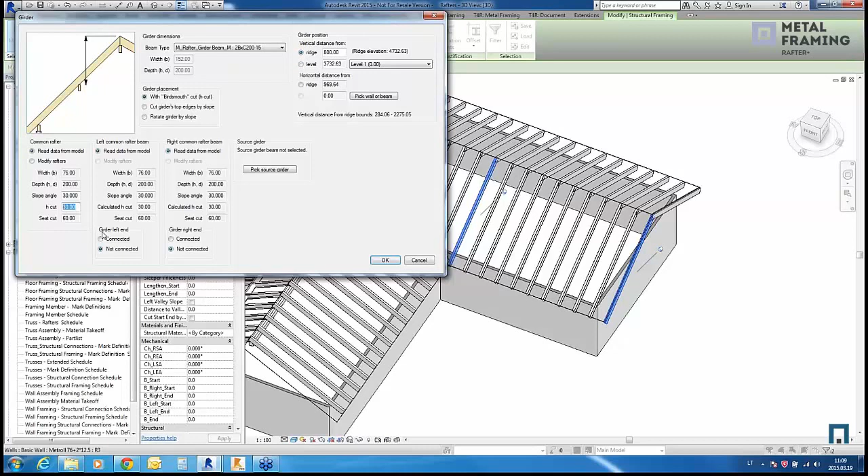So this is one option, and another one is to insert again girder beams. I will select the girder type. I will select the distance from the ridge, or I can select the distance from level, but I will select from the ridge. I will choose not to cut them and click wall. Okay, so I have another girder beam here under the rafters - it's like I want it to be.

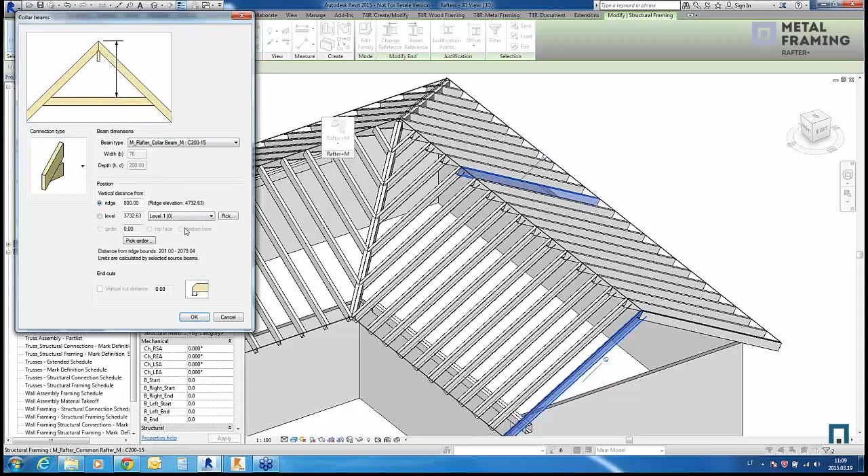Another option I will show you - I can insert, and again I select two rafters and insert collar beam systems. Let's see, we have the connection type here, this one, and we have beam type, and we have distance from ridge or from the level again. Okay, we have some elements between rafters again inserted automatically.

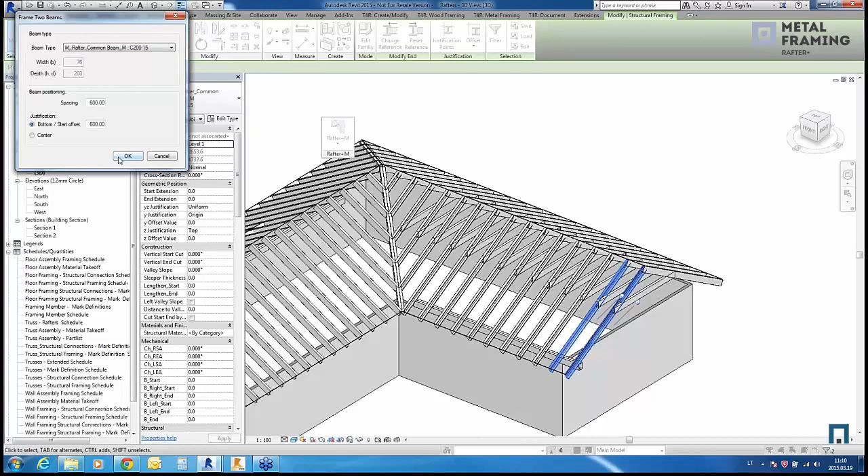Okay, what else can we insert? We can frame two rafters with beams, and then we choose the element, choose spacing, choose justification, and we can see elements inserted between these two rafters.

Now I would like to show how to insert a batten system. I will select remove, then insert create batten beam systems. I select the profile, the distance, I select the place at the bottom of the roof, and the justification of beams at the bottom, and I will make it horizontal, and click OK. Let's see.

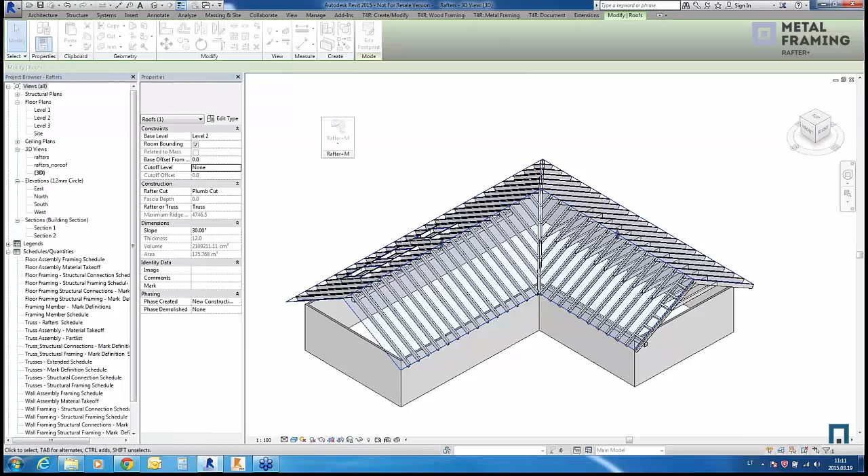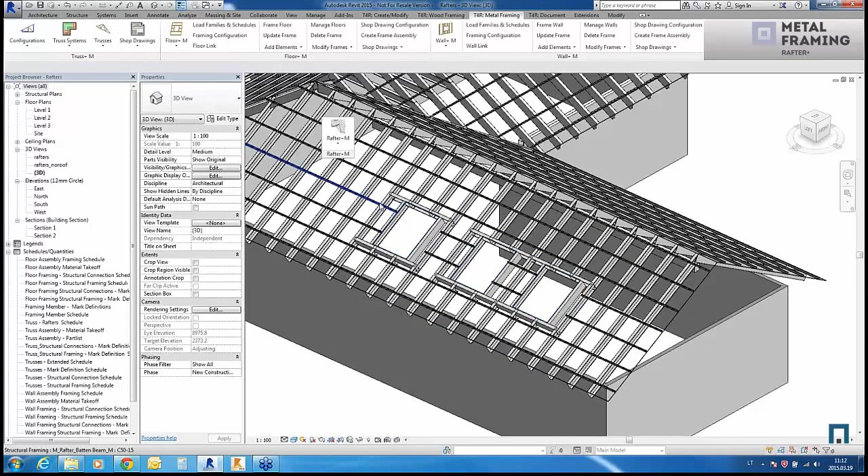So we have now batten elements placed on top of the rafters. It's nice, but we have these batten elements going through our windows, so we have to select the system and click update beam system, check for openings. It's Add element options, let's click OK. And now we have openings clear of these elements. So that's it with roof.